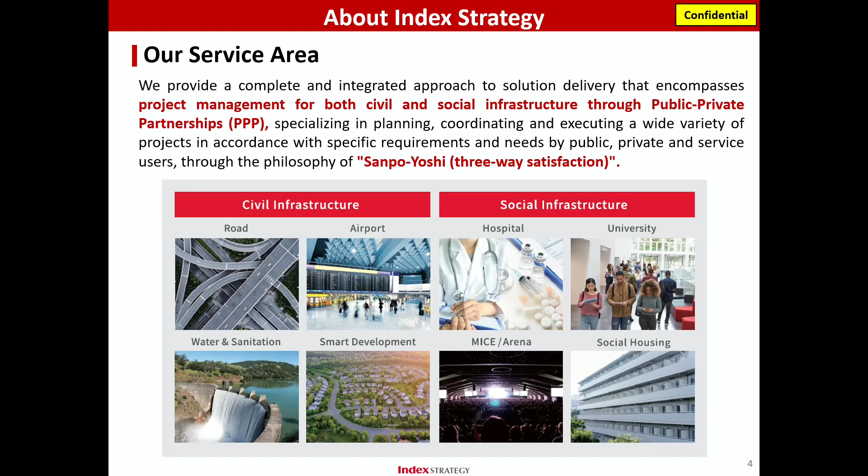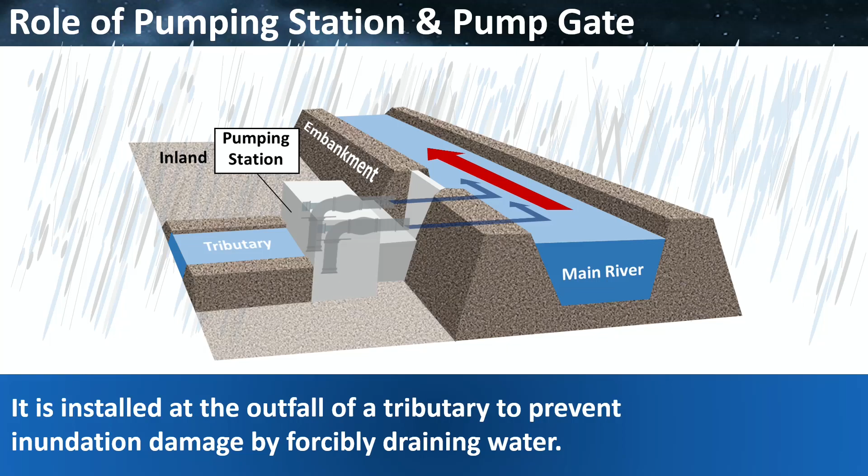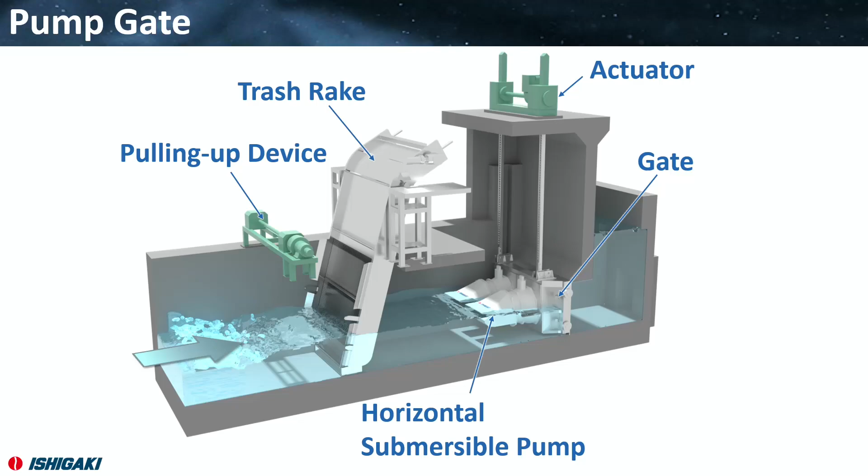This is the pump gate. It's a drainage system with an integrated pump and gate. It discharges rainwater from the left side to the right side.

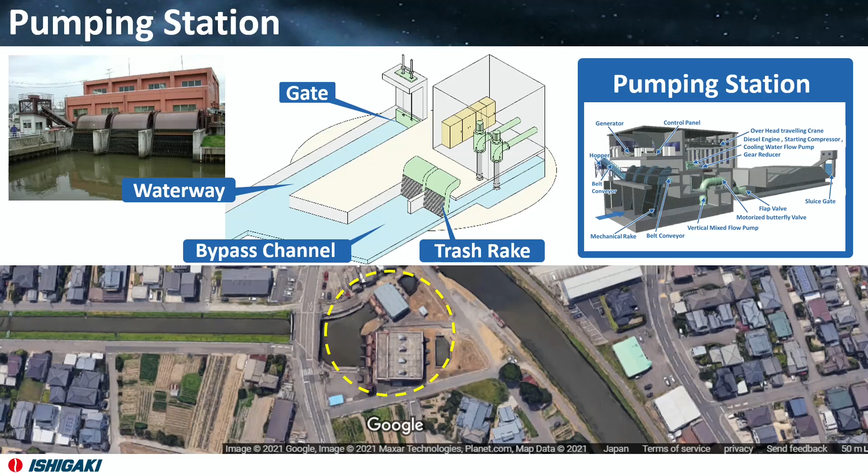This is a pumping station example. Pumping stations require a lot of land and equipment, a large building, and a bypass channel. On the other hand, pump gates don't need them. They can be installed on the existing waterway. Surrounding area is required at the time of construction, but after completion, you can utilize the land.

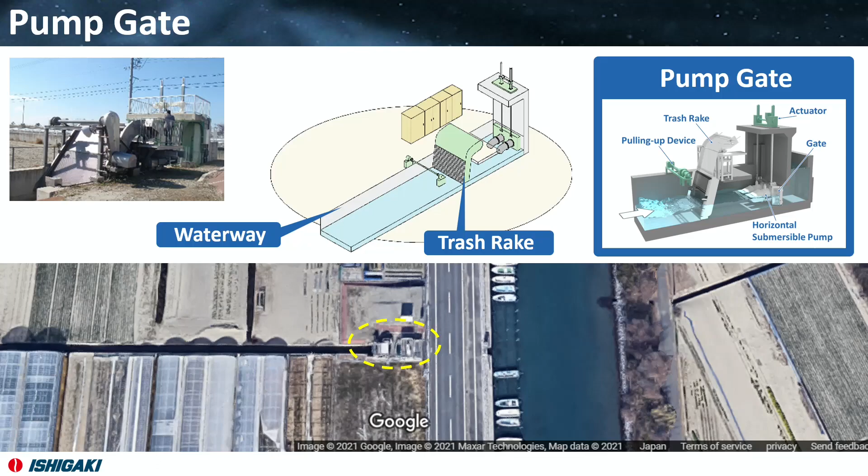This is an example of our installation of a pump gate. As you can see, all the equipment can be installed on the waterway.

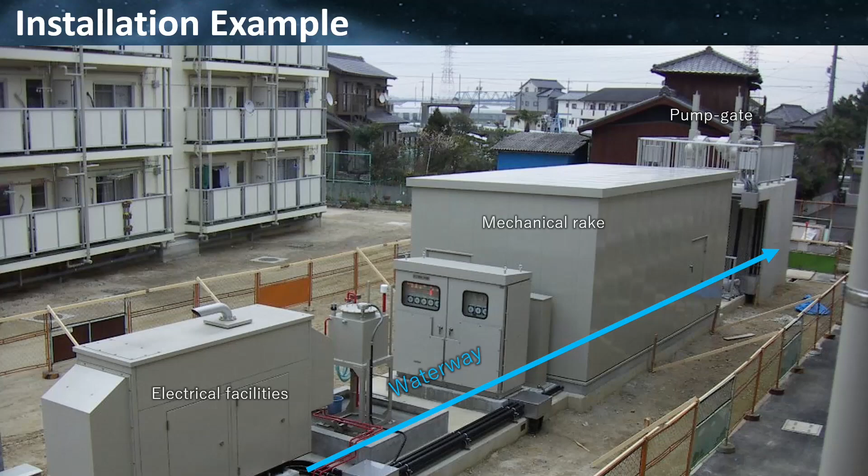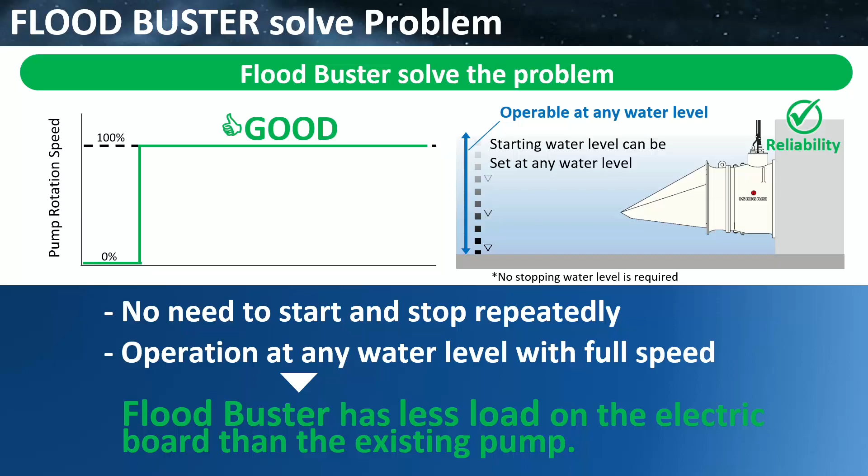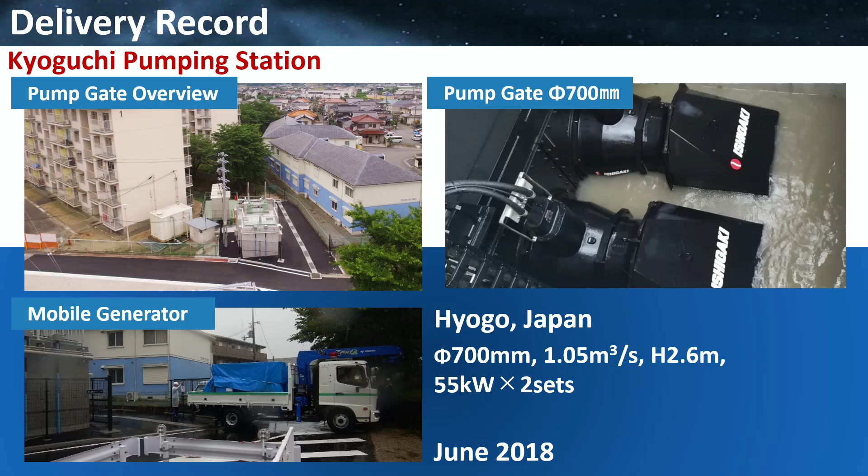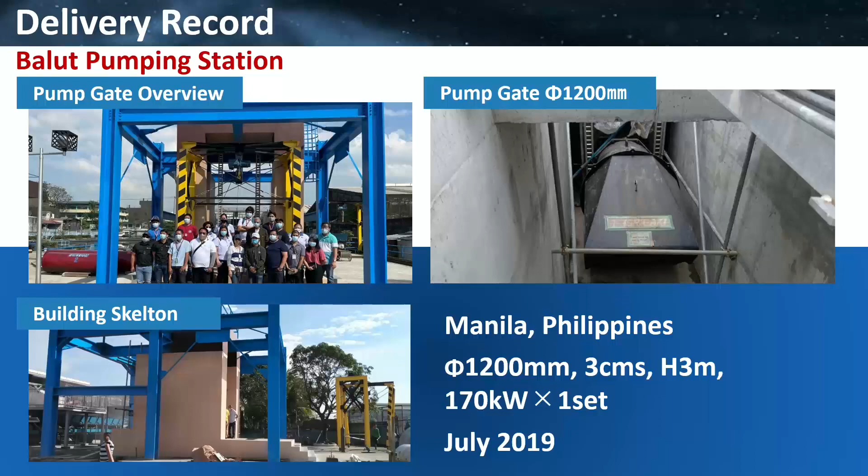Please watch the video here. This is our Balut pumping station. We have installed a pump gate for the existing pumping station. The right side is our existing pumping station, with 2 CMS. The left side is the pump gate. It is actually smaller than the existing pumping station, but it has 3 CMS. And from here you can see the actual operation.

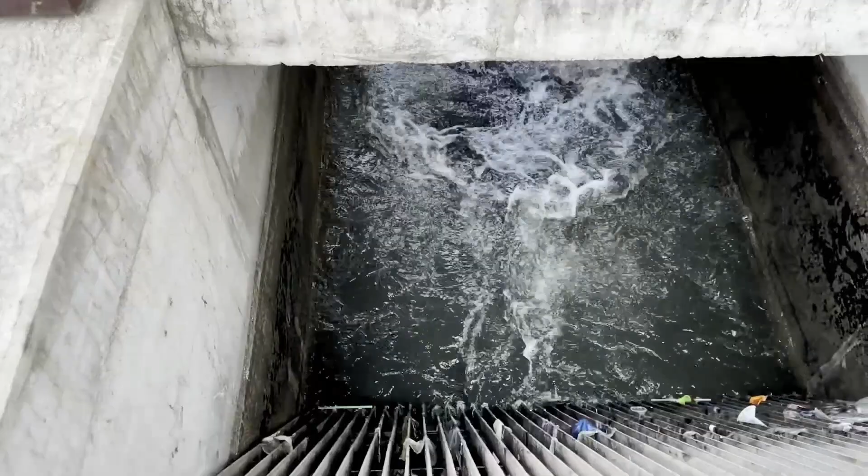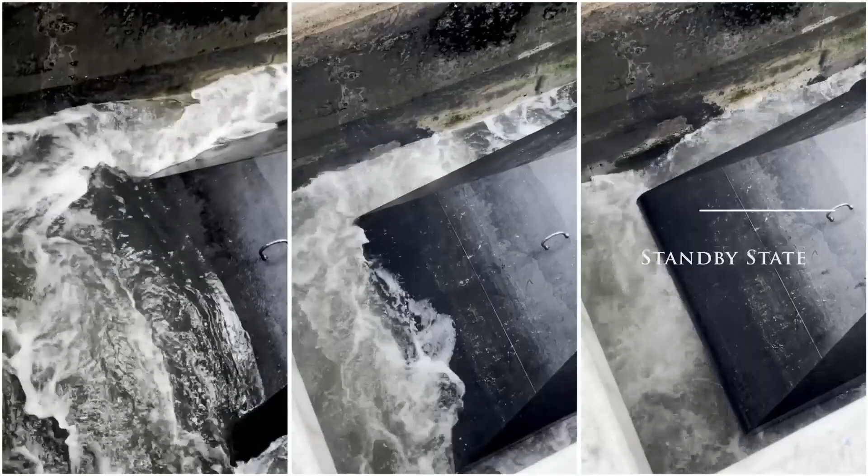Our flood buster has 3 operation modes: one is air water state, and standby state. It can discharge water relatively deeper than the other pump, so it has enough margin for sudden inflow.

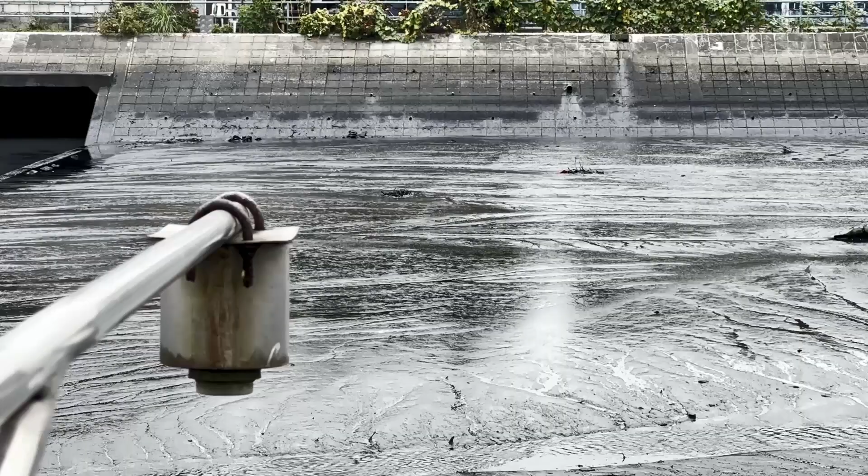Okay, thank you for watching. And in conclusion, if flood control is required in a limited place, in a limited period, with a limited budget, please consider flood buster. And also, if you would like more information, please visit here or contact me. Thank you very much.

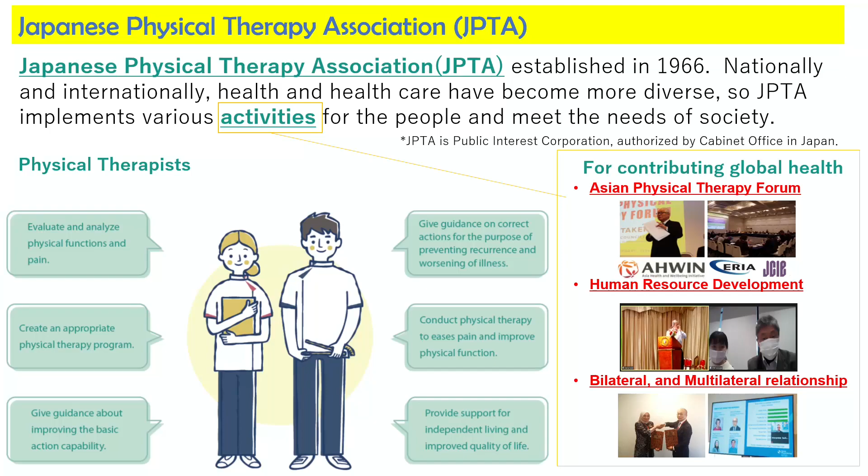So, we are called the Japanese Physical Therapy Association. Nationally and internationally, we are doing various projects and activities together with partnerships within Asian societies. For example, look at the right side of the slide: it is like the Asian Physical Therapy Forum, held together with the Cabinet Office of the Japanese government. And behind that, human resource development conducted together with the Cambodian Physical Therapy Association in University Health Science, for example. For bilateral and multilateral relationships, we have MOUs to conclude, and we work together in Thailand, Indonesia, Vietnam, and other countries.

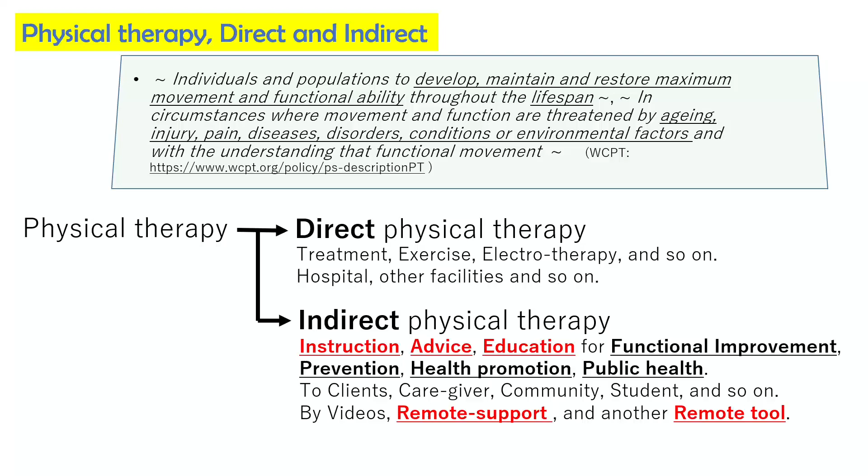We believe that physical therapy treatment needs not only direct but also indirect approaches. Direct physical therapy, as you can imagine, is treatment, exercise, electrotherapy, and so on. Indirect physical therapy is instruction, advice, and education through internet or other devices. So this is an actual example of physical therapy support within healthcare. For example, this is based on facilities such as hospitals or daycare services, where physical therapists visit the patient and provide treatment.

But with technology developed, now we can do more remotely, using internet and devices. This is an example of indirect physical therapy: teaching exercise to groups through the internet, distance learning at the university level with both pre-recorded movies and interactive classes, and exchanging academic and educational events and language systems using technology too.

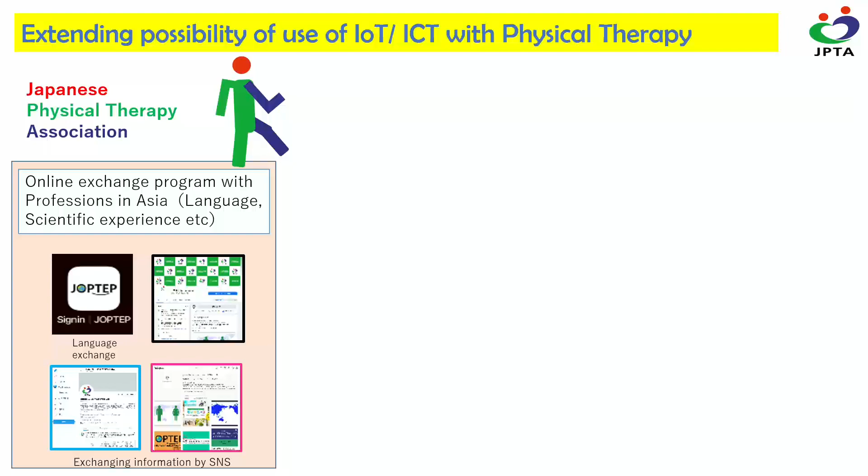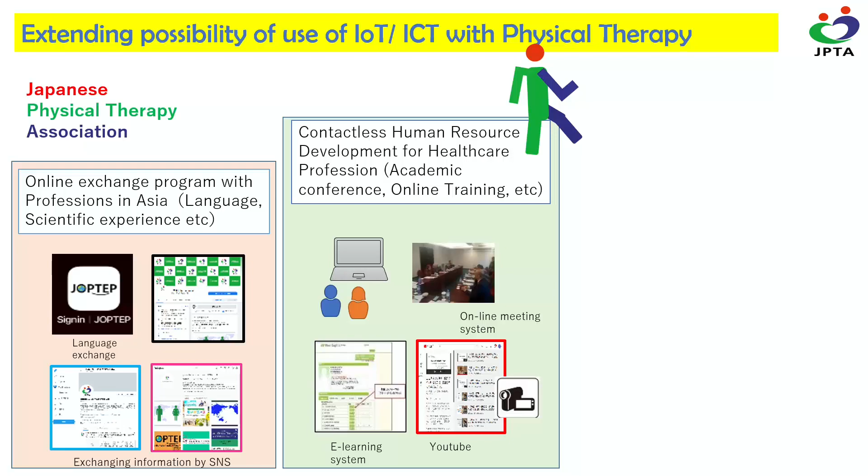So it is expected that IoT and ICT can be applied for a social platform among physical therapists and healthcare situations. Furthermore, we can do education and human resource development contactless in academic situations too. What we do for smart city and super city context is that possibility is more and more extending. With technology such as device development and robotics, nowadays the solution for healthcare is changing from medical treatment, not just treatment, but more like health prevention.

So today, we would like to propose to you a healthy society adding the skills of physical therapists within this context. Let's do this together. We are happy to work within this smart situation.

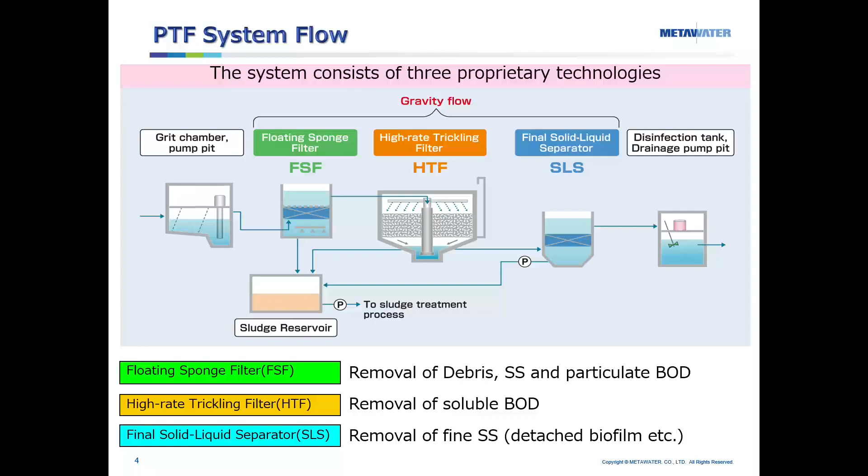We are given a certificate of technology verification from Japan Sewage Works Agency. It is proof that the performance of the PTF system was officially verified by the Japanese government. We received the certificate of technology verification for overseas in 2014.

These are advantages of PTF system, because the time is limited today, we would like to highlight only 3 at this time. One, the greatest feature of the PTF system is energy saving. The conventional activated sludge process consumes a lot of electricity for aeration in the reactor. Since the PTF does not require aeration, the power consumption is about 1 quarter.

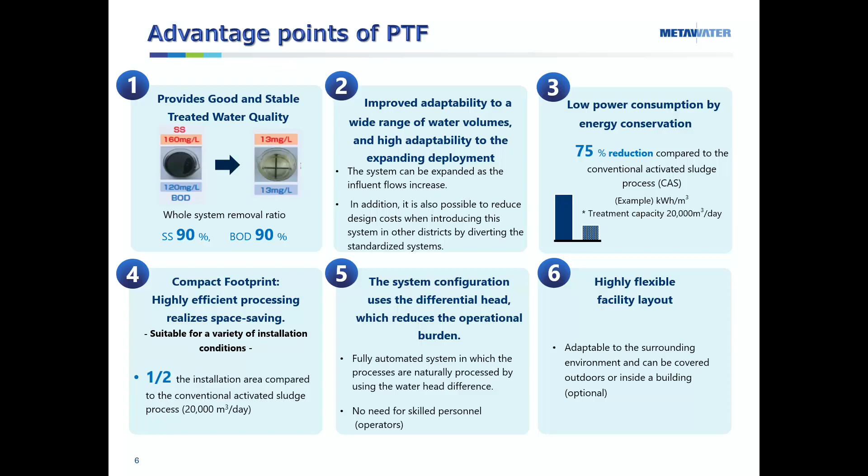Second, compared to the activated sludge method, the PTF can be installed in half the area. Third, the maintenance is very easy. Once the water is pumped up, it is treated by gravity flow. It is an energy-saving and fully automatic system that does not require skilled operation.

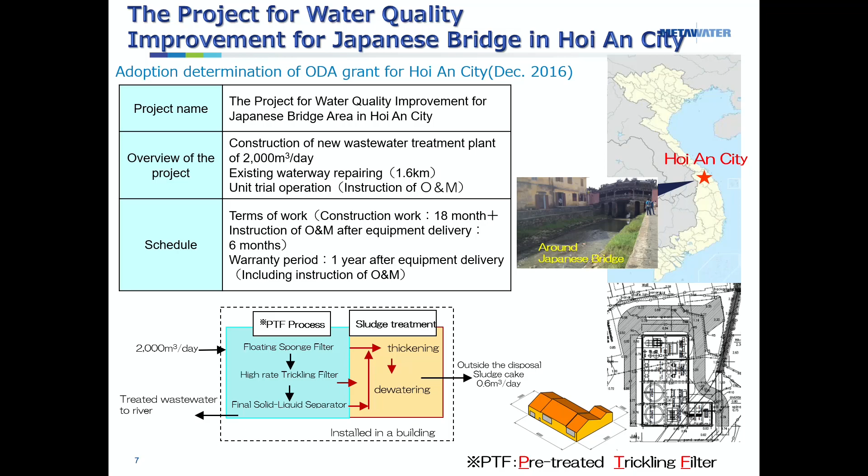This is the second installation record of PTF. The project name is Project for Sewerage System development in Phnom Penh, which started construction last year. This is also an ODA project. The main contents of the project are construction of 5,000 cubic meter per day. The construction is scheduled to be completed in November 2023.

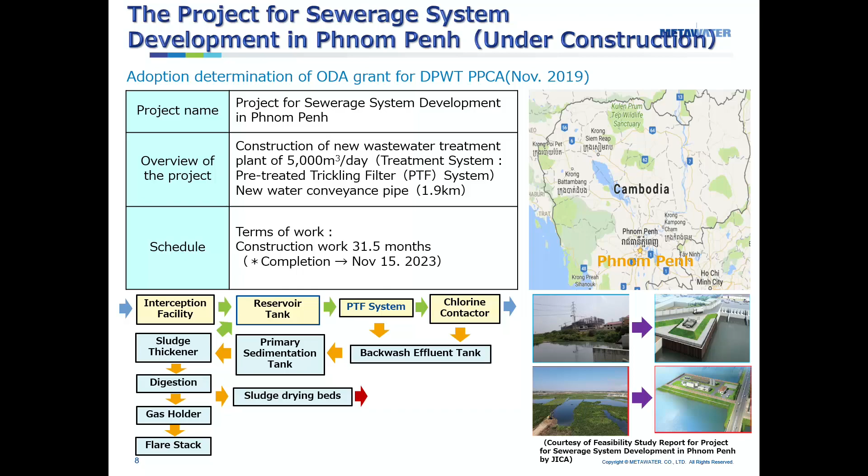Currently, we are receiving some inquiries from Southeast Asian market. It was a short time, but thank you very much. We strongly hope that this PTF system will be used as part of the smart city in your country.

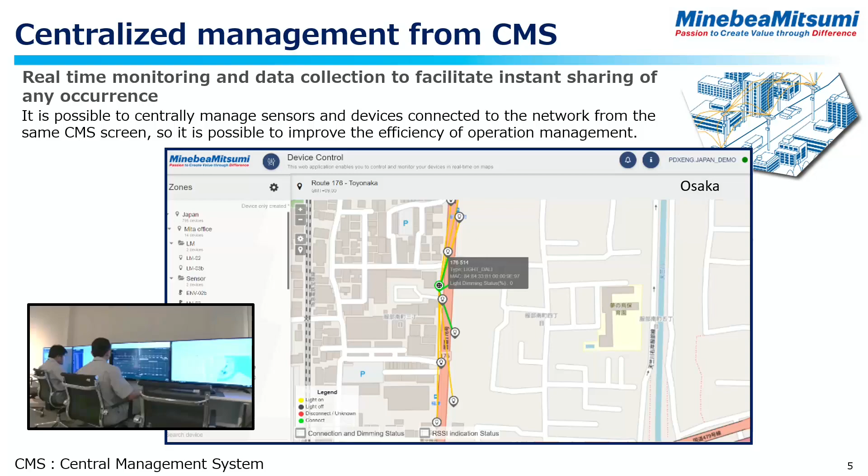For example, this one is in Japan, a road with street lights installed. We can check and monitor street light conditions one by one. We can also set up dimming in our CMS.

For example, sunset at 6 p.m., the street lights automatically turn on after the registered sunset time. Still bright after sunset, so it's okay at 50% dimming. After that, getting dark, so it changes to 100% brightness.

After 9 p.m., as cars and people go home, it reduces to 80%. At midnight, 30% should be enough for the street and town. Then finally at 6 a.m., sunrise, the town light turns off. This is all automatic.

This one shows brightness by each dimming level.

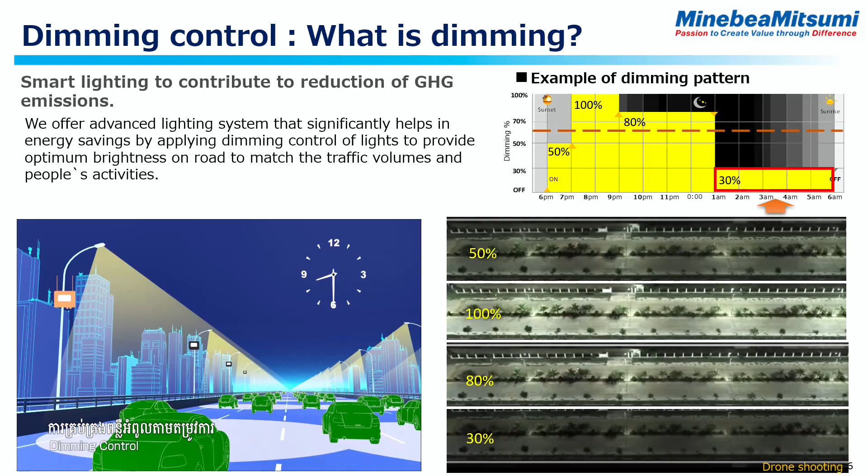Dimming is effective to reduce CO2 emission and save energy through this scheduling. This schedule can be set up based on customer requirements, so 50% flat or 70% flat can be set up, for example. Finally, comparing with a 240 watt HPS street light versus our 58 watt street light, we can save much more energy and CO2 emission.

Next, expandability. We have some sensors that we can install in the town and street, connected to our CMS platform plus other sensors.

For example, a parking sensor can collect data on parking conditions and indicate the details for drivers, so drivers can see the monitor and easily find out where it's empty.

Next, this is a smart waste sensor. Inside the waste box, we have an installed sensor that collects data on the waste amount inside the box, and then the company will go directly to the full waste boxes.

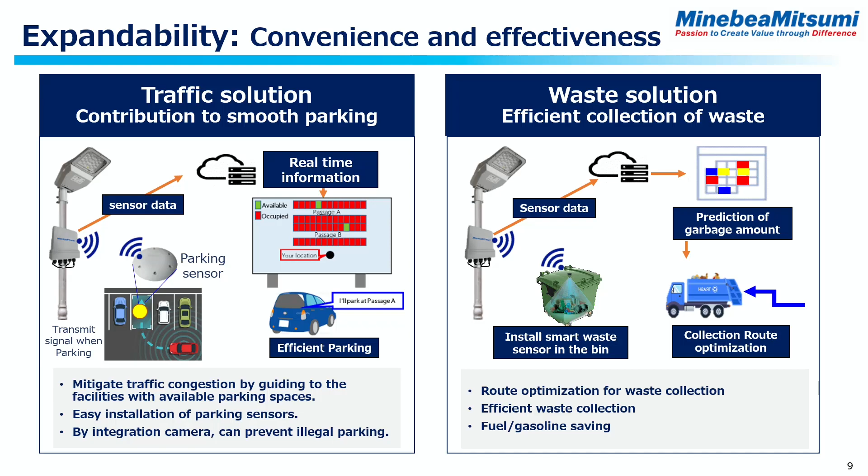Next, we have other sensors for water and weather conditions. It's easy to collect data in real time, and we can send an alert to residents, meaning in advance we can anticipate whether it will be dangerous or not.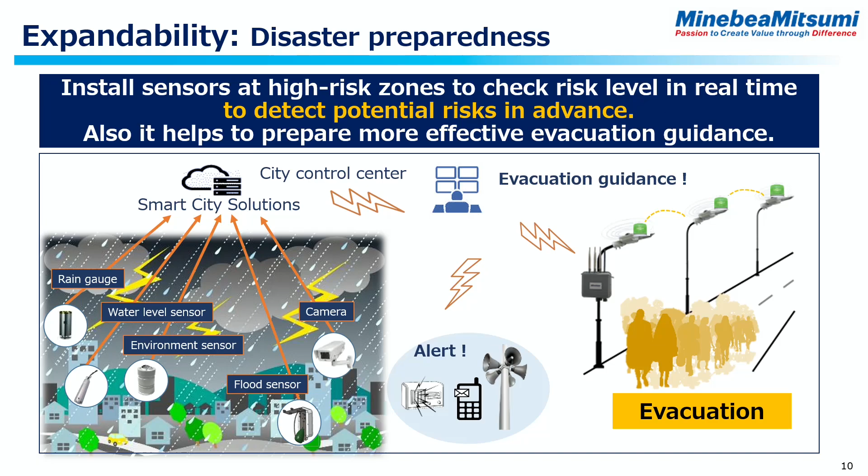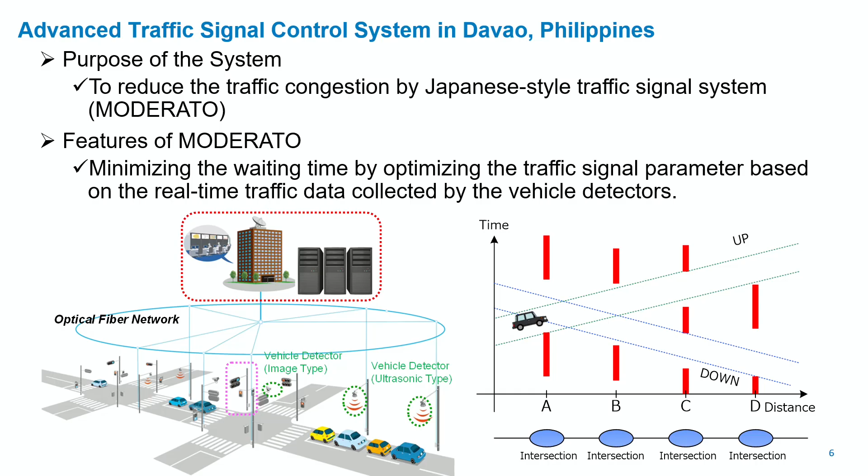Not only controlling traffic signals line-wise, Moderato can also provide area-wise traffic signal control. This is actually the main function of Moderato, and it differentiates the system from other country systems.

So what is area-wise traffic signal control? When processing, Moderato automatically creates a sub-area, which is a group of intersections that have the same traffic tendency. This becomes the smallest control unit, and Moderato optimizes traffic flow by sub-area.

But as you know, traffic flow tendency changes over time, so it's very important to adapt the control to the real traffic situation.

For example, in case the traffic flow increases from south to north direction like this, the system adapts by creating a larger control area through merging the sub-areas. In this way, Moderato changes the form of sub-areas in accordance with the real traffic situation.

We believe this system will be very effective in decreasing traffic congestion in Davao City and also other cities in ASEAN countries.

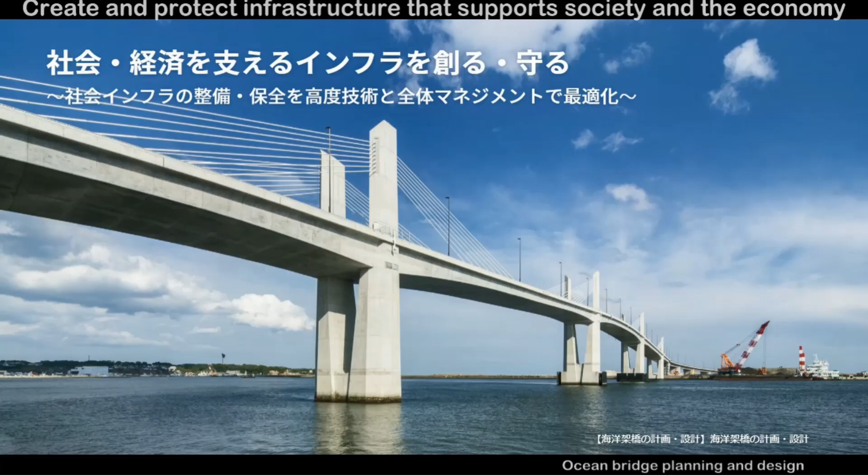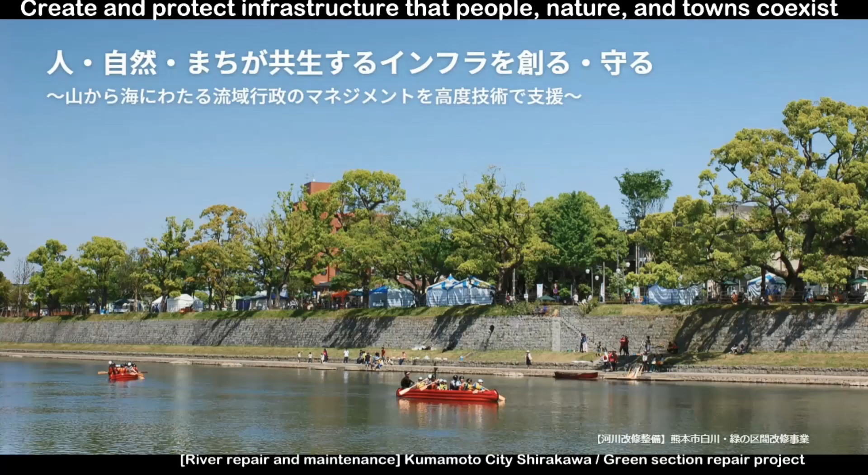We are a social value creation company. We are Oriental Consultants. We aim to create and protect infrastructure that supports society and the economy. Create and protect infrastructure that allows people, nature, and towns to coexist. Protect society and communities from disasters, using both soft and hard measures. Achieve safe, smooth, and comfortable transport by utilizing advanced technologies and well-designed road spaces. Improve the overall attractiveness of areas through coordinating management and design across various fields.

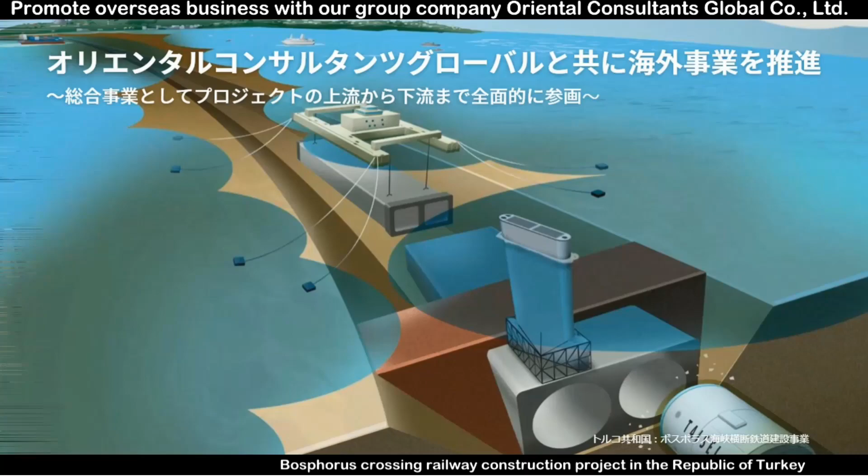Promote overseas business in collaboration with our group company, Oriental Consultants Global. We are committed to assisting our ASEAN Smart City projects.

So now that you already understand the outline of our company, I'd like to emphasize three points about my company. Number one, we are a value-creating company, not just engineering consultants. Number two, we take a comprehensive strategy and approach to give value to society. And number three is very important: we are not only an engineering consultant, but also a part of the investor.

So I'd like to show an example, the latest project in Japan, which is one of our smart city projects, located in Taki Town in Mie Prefecture. So let me show you.

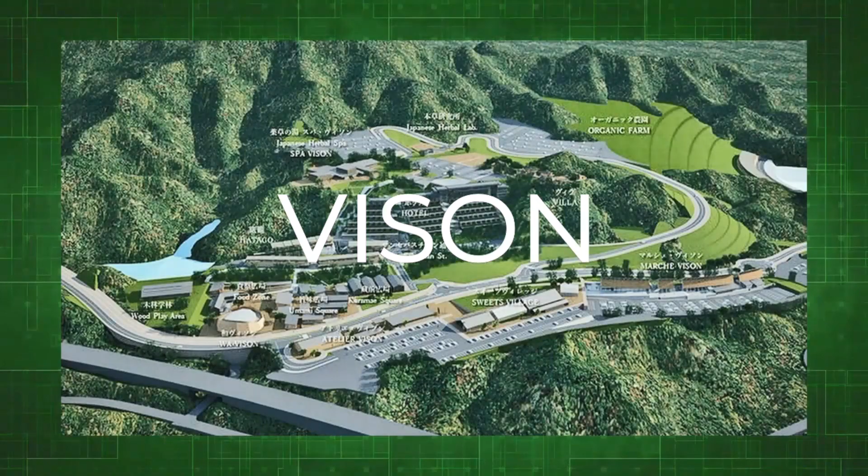VISON. VISON means a beautiful village in Japanese. VISON is a project designated as a model of the Mie Regional Cooperation Super City concept promoted by Taki Town, Mie Prefecture. The concept of Super City is an urban development challenge being tackled in Japan. It aims to improve the welfare and convenience of residents and visitors by providing various services. It centers on a data linkage platform that collects, organizes, and provides various types of data across fields.

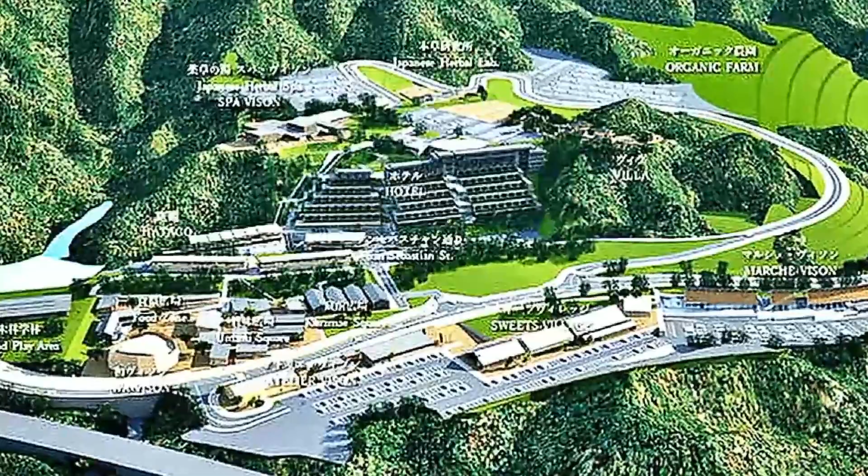The site area of VISON is approximately 119 hectares. It is one of the largest commercial resort facilities in Japan. Here you can experience relaxation, good food, and educational activities thanks to its proximity to the mountains. The grand opening was on July 20th, 2021.

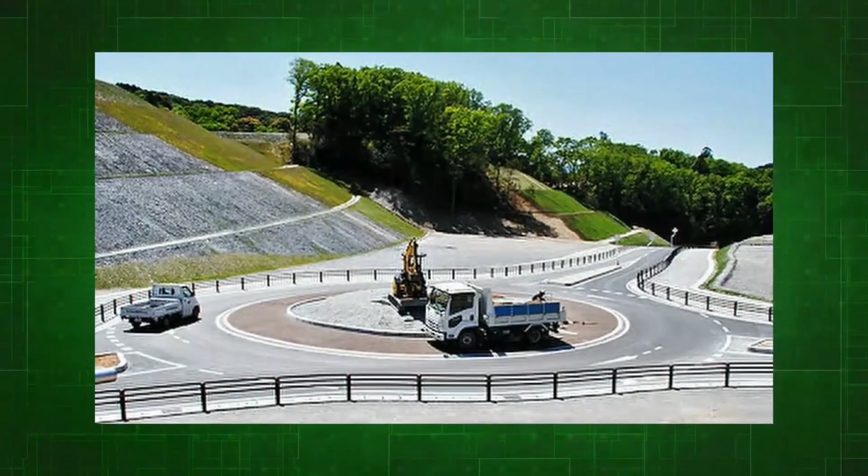We have been involved in this project since the primary planning stage in 2014 as infrastructure experts. We were involved in the basic planning and design of the entire facility, development, permit procedures, transportation planning, and road design. Specifically, for one aspect of the project, we installed an automatic gate on the expressway dedicated to automobiles. We have also improved the ability to attract visitors and facilitated traffic control within VISON.

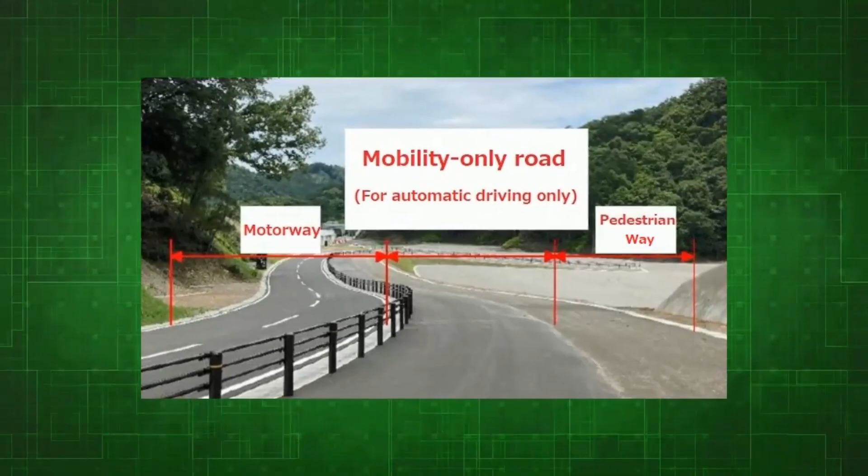In addition, VISON supports small-scale mobility within their grounds. Autonomous driving is a new means of transportation that allows tours within the spacious grounds. We planned and designed a dedicated mobility route that connects the roads and trails within the grounds to allow for autonomous driving operations.

Going forward, we will continue to participate in the Mie Regional Collaboration Super City Initiative, continuously working to resolve social issues. Our aim is to further contribute to the entire region and also worldwide.

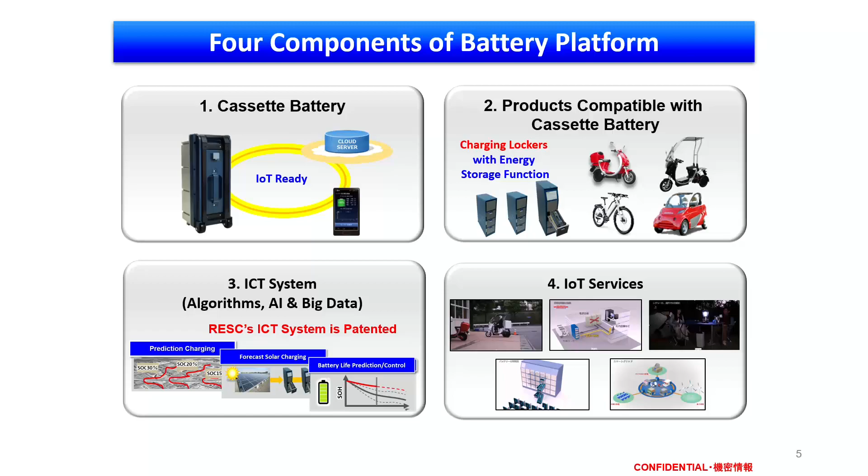Then also IoT service. In the following movies, I'd like to show you our IoT service. First one is for the e-mobility market.

With a smartphone app, users can check the travel distance of e-mobility very accurately. They can also find the location to swap the batteries. For this e-scooter case, cassette battery is stored under the step. And this is our battery charging locker that users can swap the batteries from empty one to fully charged one very easily.

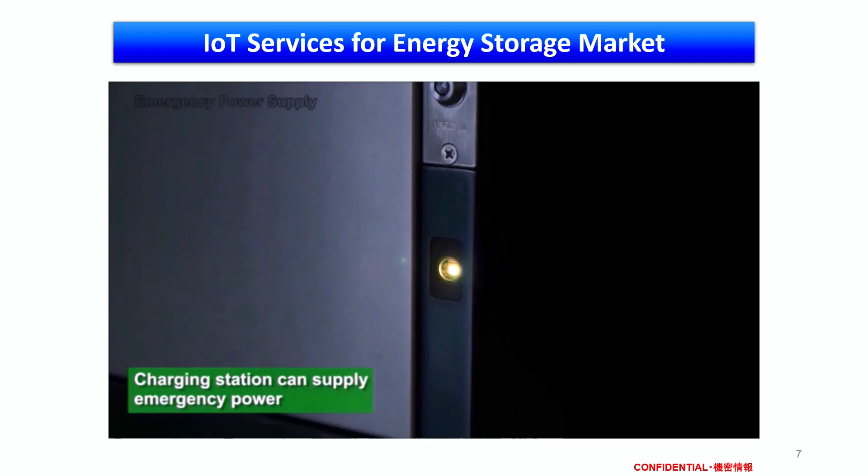The next movie is for the energy storage market. First one is an emergency power supply, like backup, to improve the resilience. Our battery charging locker not only charges the batteries inside, but also allows users to swap the batteries. In case of a power blackout, it could provide electric power to outside facilities and equipment.

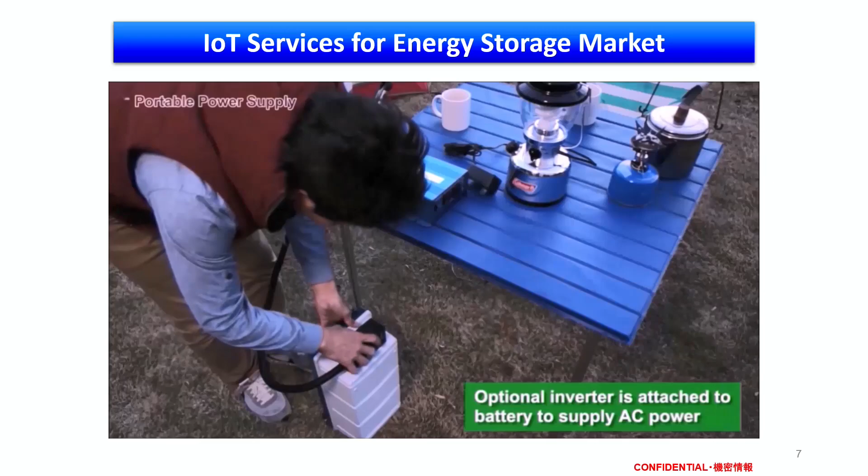Next one is portable power supply. Because cassette battery is so portable, it could be used for outside activities like camping.

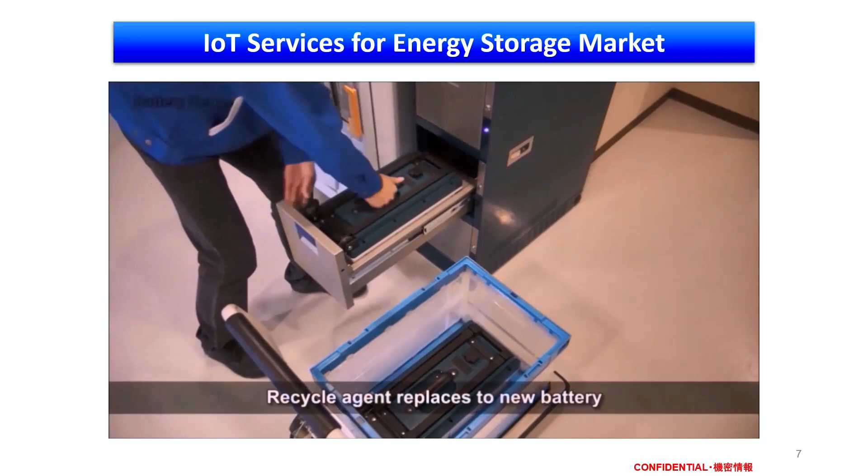Next one is battery reuse. Any kind of battery always degrades after being used a number of times. So we utilize our battery platform to optimize the timing to collect the degraded batteries, and then we use the collected degraded battery for energy storage systems. As you know, for the massive introduction of renewable energy to the power grid, we need more energy storage systems because they could stabilize unstable renewable energy, such as solar power and wind power.

The last one, but not least, is smart grid. By connecting our battery charging lockers and energy storage systems with degraded batteries, our battery platform could be utilized for virtual power plant, demand response, and microgrid.

This is a list of our core competence, such as maximizing user convenience in utilizing the charging lockers, and lifetime and reuse efficiency of batteries and so on. All these can be accomplished by our patented ICT system and prediction algorithm, by controlling battery charging speed and timing in real time, remotely from the ICT system. And we have 6 patents in Southeast Asia also, covering 6 countries.

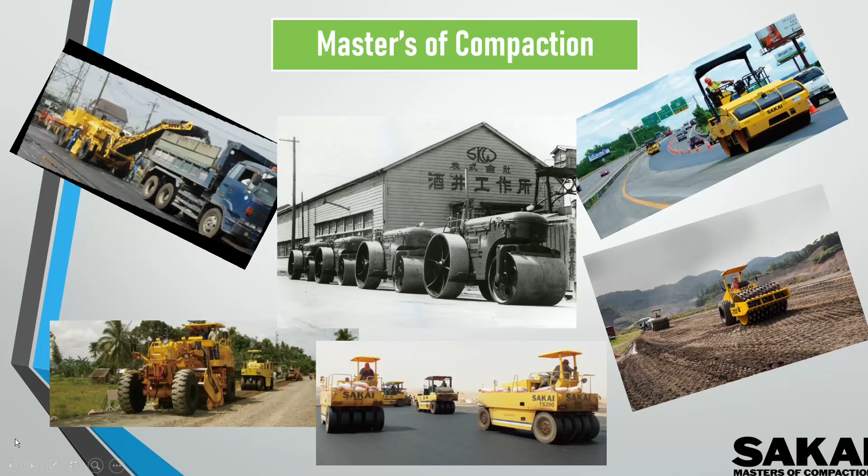Our company has been manufacturing road construction equipment for over 100 years, like vibrating rollers, macadam rollers, and pneumatic tire rollers. We have 4 sales offices, 43 distributors around the world, and have exported to over 130 countries till now. We have 4 factories, including the mother factory in Japan, and the others located in Indonesia, USA, and China.

Recently, we have concentrated on developing automatic control with DX and carbon neutrality at construction sites. For example, this autonomous drive bus is in SAKAI Town, not related to our company, and we have a test field for driverless trains and following trucks.

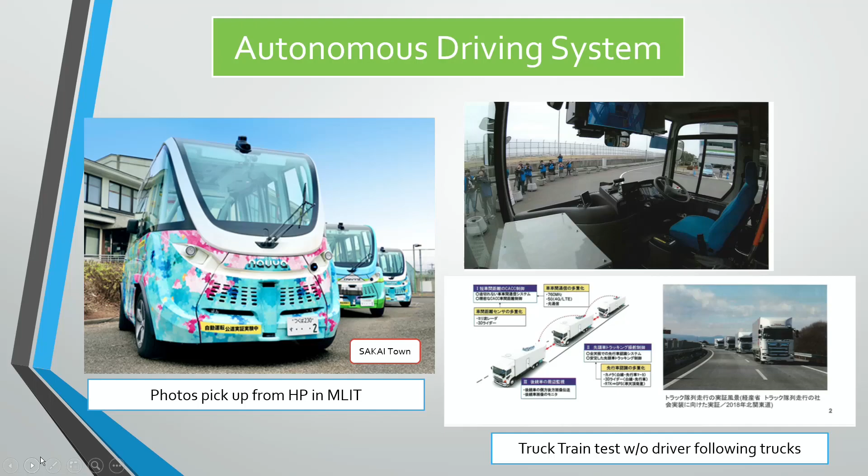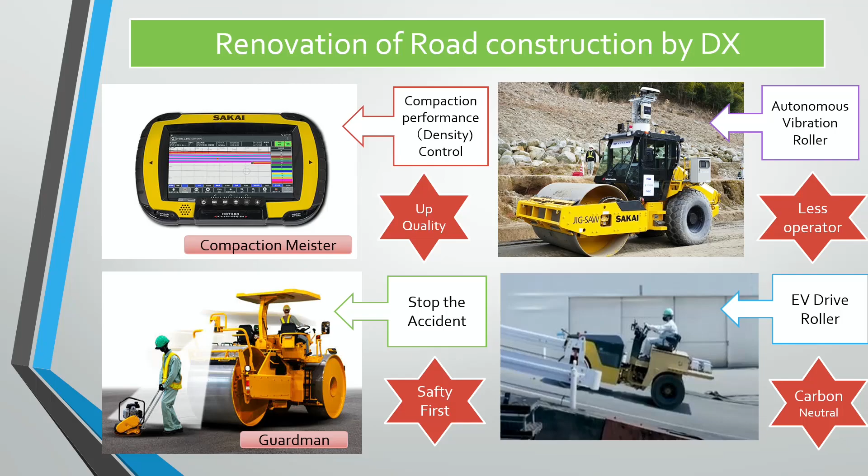And the last one is an autonomous driving vibrating roller, same as the autonomous bus, with automatic control to compaction locus. Due to our limited presentation time, we can't show you this video now, but we can show you at our booth on the same floor.

By the way, going forward it is expected that many smart cities will develop in the Asian area, but it seems more important to collaborate city to city. A smart city will have to cooperate together, like SDGs 9 to 11.

Even in a moderately developed urban city, it is not a truly well-being urbanized city if there are bad condition roads between city to city. Therefore, road maintenance is needed to keep roads in good condition.

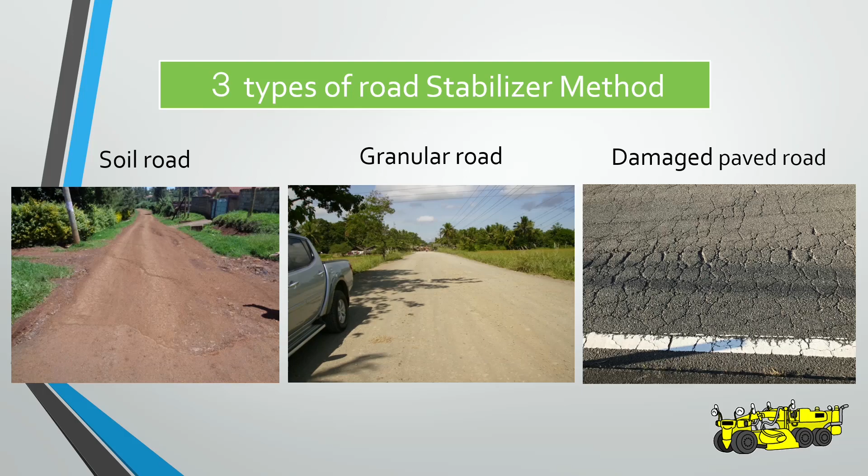This is a road stabilizer, which remakes weakened road base course by mixing it with additives like cement, lime, or emulsion at the drum. The road stabilizer can recycle soil roads, granular roads, and damaged asphalt pavement roads.

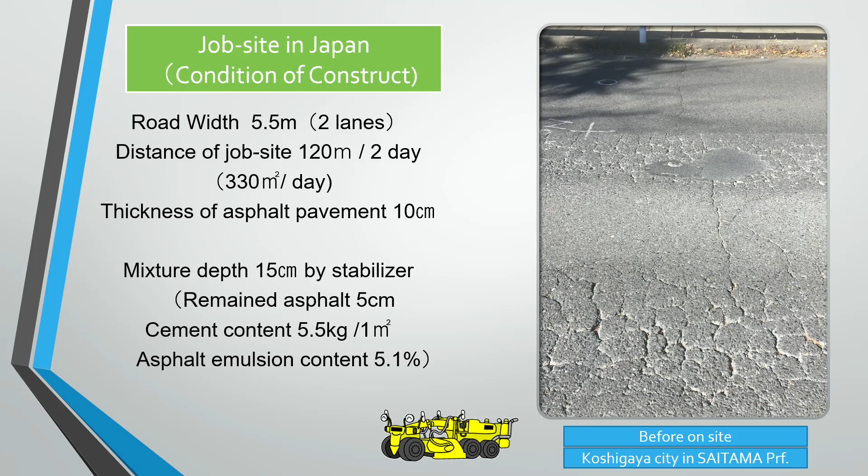We have a stabilizer job site in Japan. This damaged road is located in Koshigaya City, in a residential area surrounding Tokyo. The stabilizer mixes with this material, combining original base course materials including damaged asphalt and cement, plus liquid emulsion as additives.

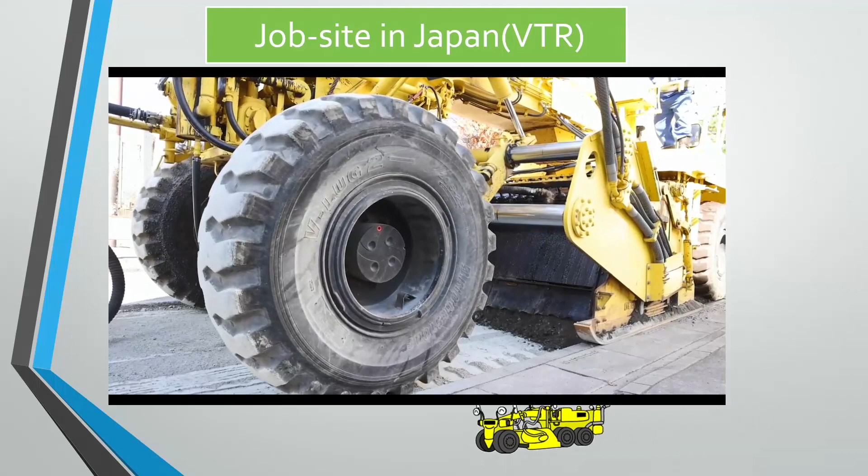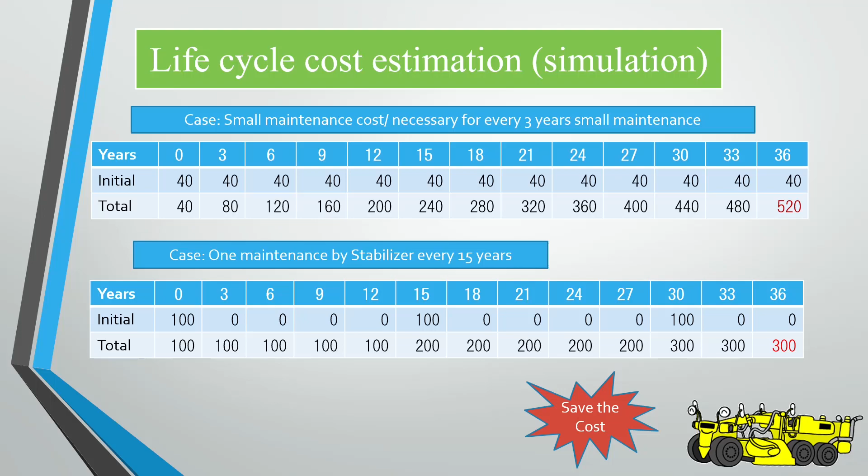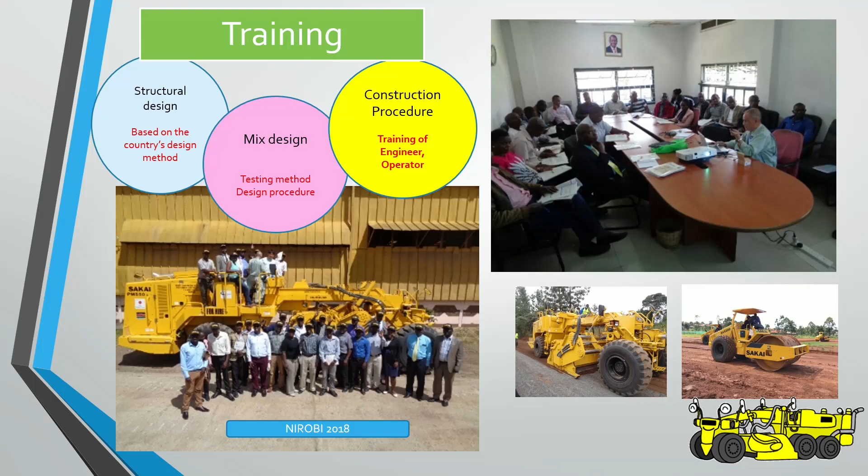We cannot construct road renewal ourselves because we are not a contractor. However, we have skilled engineers who can provide technical transfer training for engineers from your countries using our stabilizer. This is a training photo from Kenya in 2018.

The stabilizer method offers good merits, including not only cost reduction, but shortened job site terms, construction in good condition with a long life road, construction of all-weather roads from soil or granular roads, and construction of strong disaster-resistant roads.

Good afternoon, everyone. I'm Tatsuki, CEO of Scheme Verge. We're a software startup company from the University of Tokyo, but we have already implemented many smart city projects in Japan, and I want to expand our business to Asian countries, so I came here today. Our mission is to make travel destinations and places to live more attractive by improving the entire area's experience using data and AI.

This is how we see the problem. In order to appeal to and improve the experience of an entire area, it's essential to cooperate with tenants, surrounding areas, or mobility services—not only to strengthen individual facilities or services, like making a big building or a very good museum, but to implement joint measures in collaboration with stakeholders. However, most such collaborative measures are implemented using paper and a very analog approach.

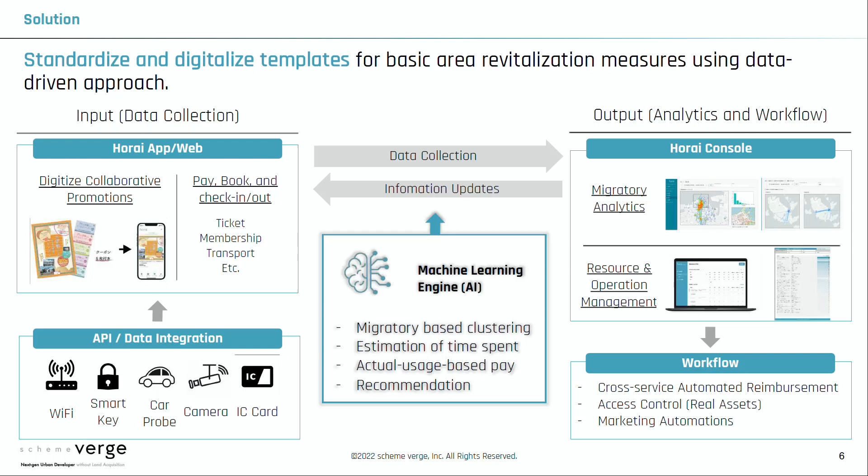Our Horai can connect with Wi-Fi, smart keys, car probe data, or any kind of smart city data through APIs. And the user experience of our solution is as follows.

We use NFC tags for the payment solution, so we can detect where users visited. All customer data is collected and displayed in real time, reflected on one screen in this console. This solves issues such as slow payment calculation and fraud.

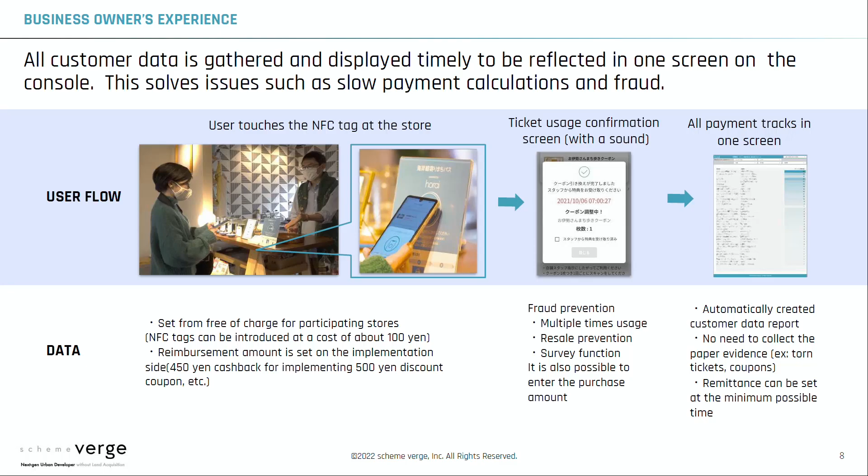By doing so, we can realize highly accurate PDCA improvement of time spent, range of circulation, or amount of spend.

Our business model is a software-as-a-service model, so we can start a smart city project at a very low, reasonable cost.

We have already expanded into major Japanese tourist areas and several smart city projects in Japan. We started our business from the Setouchi Triennale, one of the most high-end tourist areas in Asia.

I want to share our experience and know-how of making a good destination with overseas partners. Our solution is also used in Kobe, Ise Shrine, Aichi Highway, and others. We already have many reputations and acknowledgments in area management and smart city fields in Japan.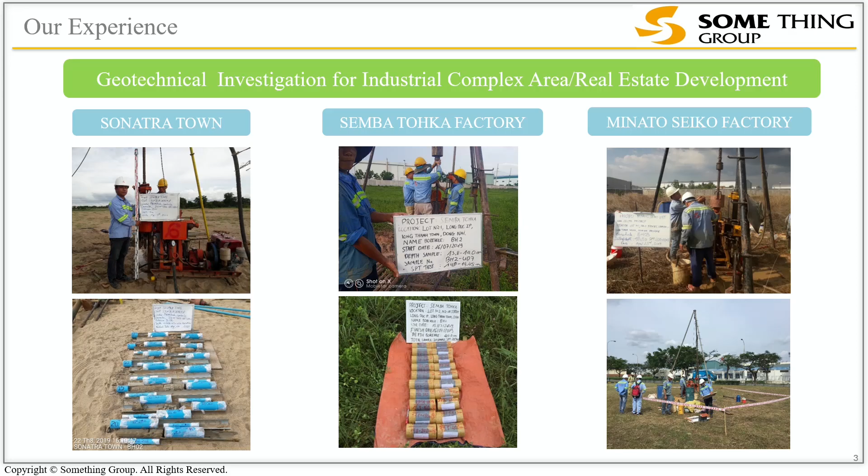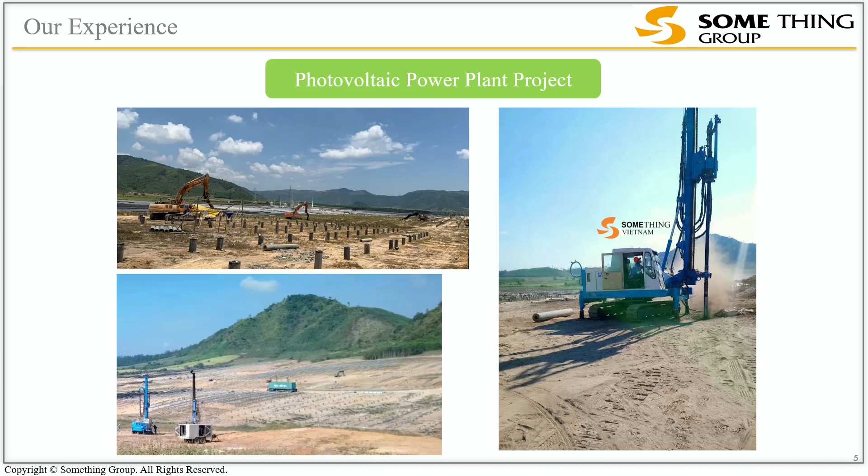Here I would like to show you some of the experiences we had in Vietnam. For example, we did a soil investigation for the industrial complex area and real estate development. We also did soil investigation for the offshore wind power project, the photovoltaic power plant project, and the wind turbine foundation project.

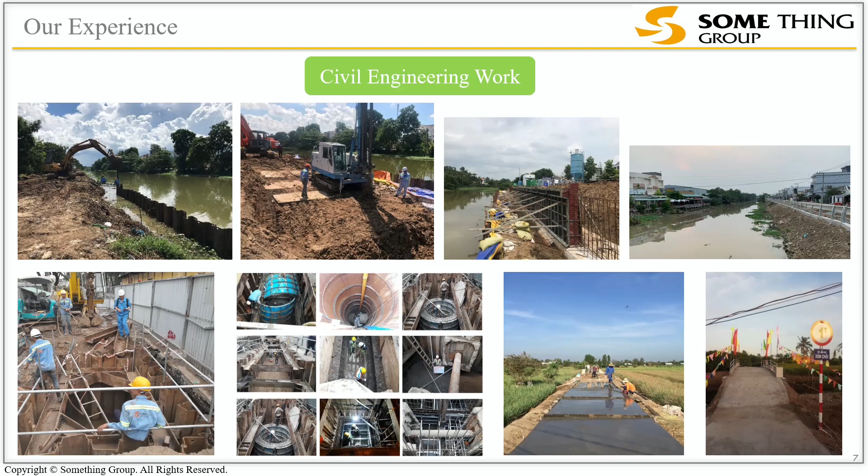For the civil engineering work, as shown in the photos here, to prevent the collapse of the riverbank we did reinforcement of the riverbank, and also other works relating to the sewage pipe, and construction of road and bridge.

For the experience in Cambodia, in 2019 we conducted a soil investigation for the improvement project of National Road Number 5, in Battambang province.

That is all for the very brief introduction of Something Group. Now let me move on to the introduction of Patrol Pigeon, which is one of the technologies of our group company. Patrol Pigeon is the IoT equipment for the measurement of meteorology.

You are able to obtain measured data such as wind speed, wind direction, temperature, humidity, heat stroke index, water level, and so on. You can immediately see those observed data or information via your mobile phone or laptop.

For the purpose of using this Patrol Pigeon, you can use it either for safety at the construction site, for disaster prevention, or for security.

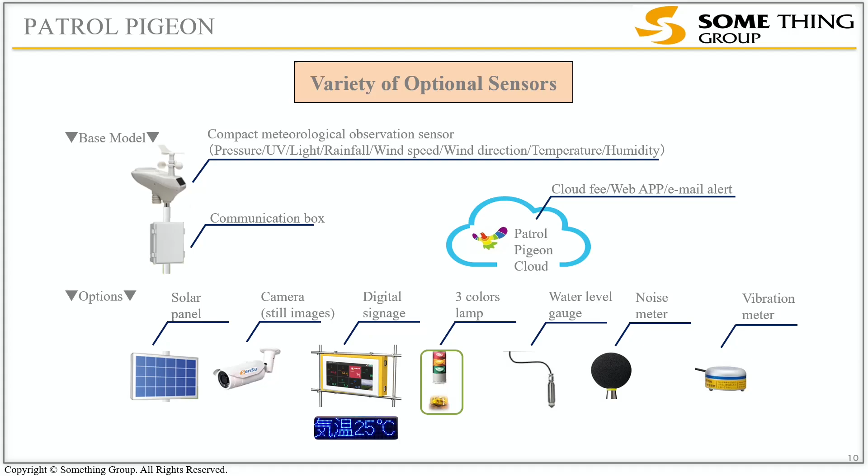That is all for my presentation today. Thank you for your kind attention, and we'll be waiting for you at the booth.

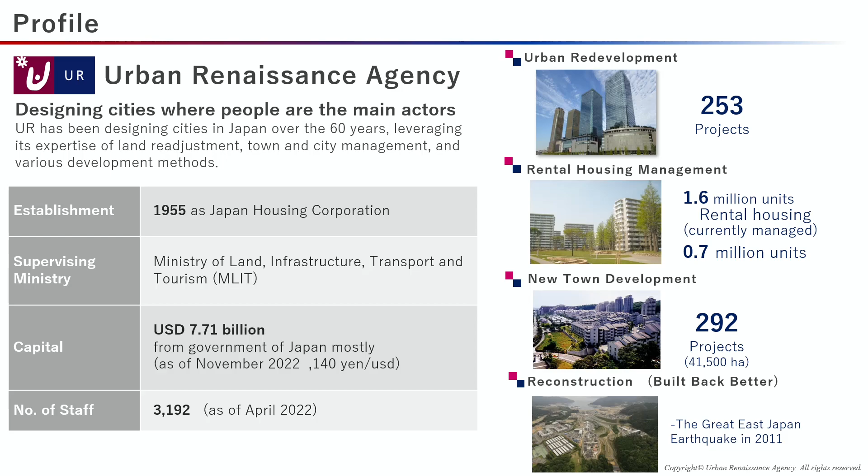Today, I would like to introduce a recent example of a project in the field of urban redevelopment. The location is in the Yaesu area, the east front area of Tokyo Station. There are a lot of aged buildings, office buildings in this area, and the project is to develop one of the largest integrated bus terminals in Japan by utilizing the opportunities of 3 urban redevelopment projects planned here.

Tokyo Station is a gateway to Tokyo and the hub of buses for various parts of Japan. However, since bus stops are scattered around the station, it is inconvenient to transfer from the station to the bus station, and sometimes it will be hindered for people because of people waiting for the bus.

So in this development, we aim to solve this problem by consolidating the bus terminals in line with these three urban redevelopment projects.

This redevelopment project is divided into three projects, so usually it is very difficult to coordinate together. But UR has coordinated and realized the integrated use of bus terminal by acquiring the bus terminal floors in three areas at once. In addition, developers are given incentive for advanced use by maintaining the bus terminals, which improved the feasibility of their projects.

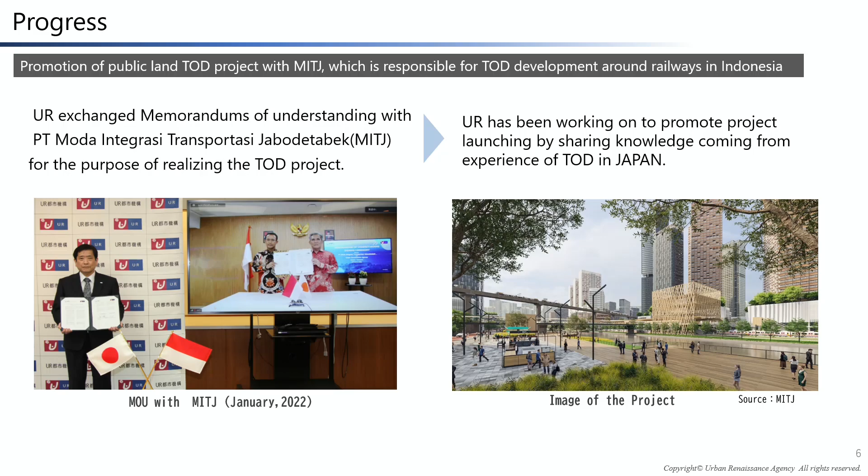So this is an example. We exchanged the MOU with PT Moda Integrasi Transportasi Jabodetabek, MITJ, which is a subsidiary company of MRT Jakarta, for the purpose of realizing the TOD project. They want to implement the TOD project, and UR has been working to promote project launching by sharing knowledge from our experience with TOD in Japan.

Today it's a very short time to explain our project in detail, so maybe we can discuss it, or I can talk after this session. Thank you very much. Thank you for your presentation, Mr. Kano.

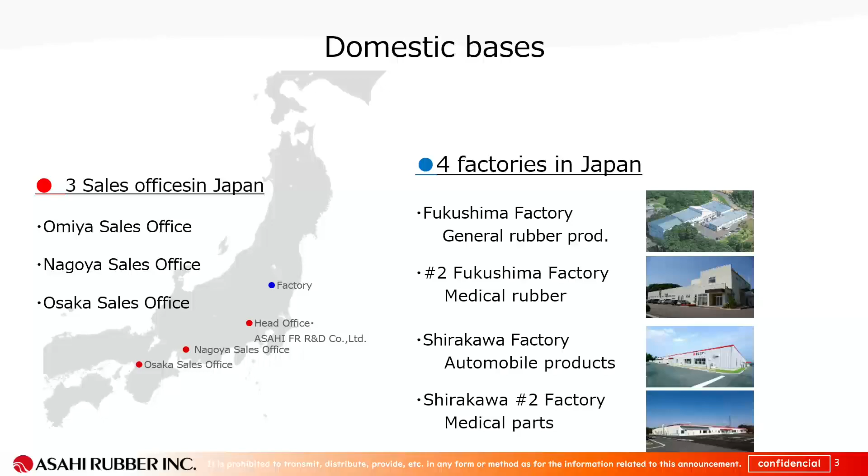On a domestic basis, we have 3 sales offices in Japan: one in Omiya, Saitama Prefecture, which is the same location as our headquarters, and the other 2 are in Nagoya and Osaka. We have 4 production bases in Japan, all of them in Fukushima Prefecture, about 200 kilometers north from the center of Tokyo.

For overseas bases, we have 1 production base in China, in Dongguan, Guangdong Province. In China, we have 2 sales offices, one in Shanghai and another in Hong Kong. We also have a sales office in Chicago, USA. With these sales members, we follow up with our customers all over the world.

We are rubber specialists and do business in a variety of fields: optical field, medical life science field, functional and communication field. In the optical field, one of our key products is capped LED. We design and manufacture capped LED as custom that converts the LED wavelengths, and as a result we can regenerate more than 10,000 colors. This technology is used mainly for automobile interior lighting and general lighting.

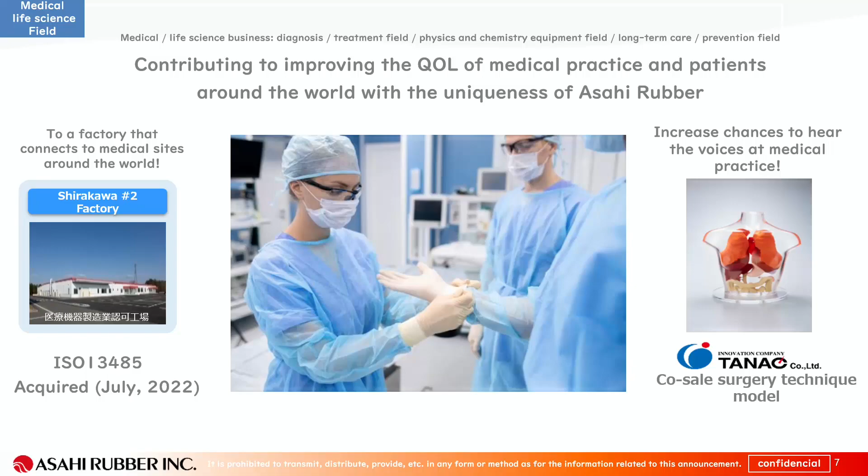Our medical and life science products include, for example, check valves used for hemodialysis, etc. Other products include rubber stoppers, such as pre-filled syringe gaskets. Those products are made in medical factories using CO2-free electricity. Their production environment is equivalent to ISO Class 7, US 10,000, and we've obtained ISO 13485, which is necessary to do medical business in the world.

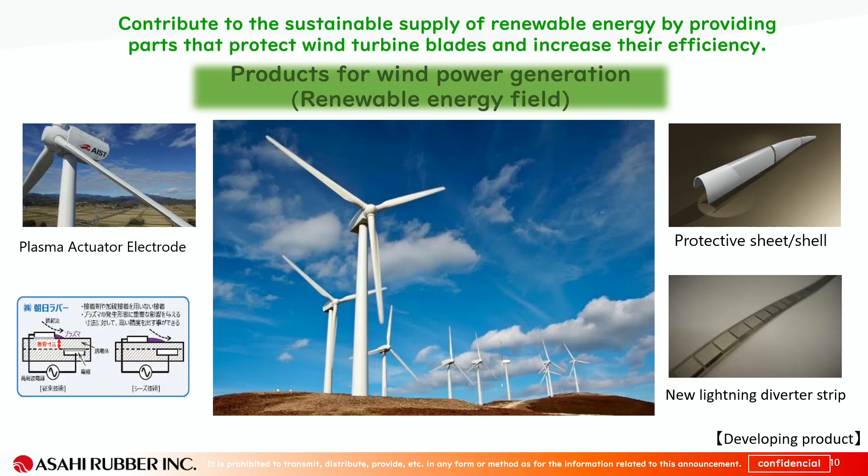Wind power generation is also widely used in the world, but all of them are set outside. Our silicone technology can help them to protect their equipment. With our airflow control technology, we can improve the efficiency of power generation by creating plasma discharge.